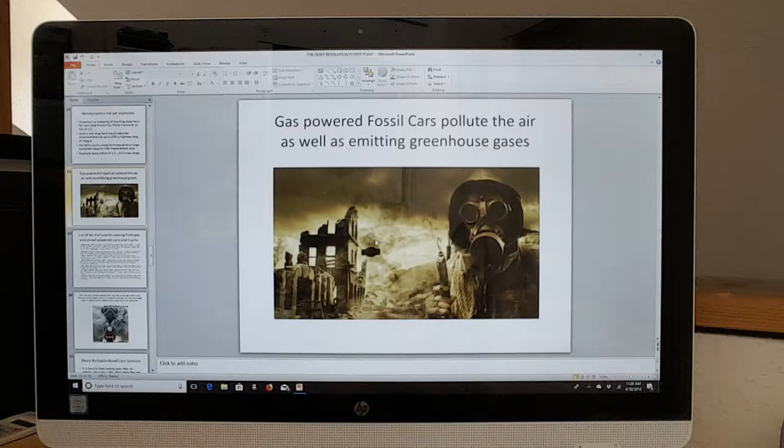So here we are. My first slide here is a little bit whimsical. It's an apocalyptic scene. But what I'm trying to get across is gasoline-powered fossil cars pollute the air as well as emitting greenhouse gases. And so I went online and I found a list of the air pollutants that come from gas and diesel-powered cars and trucks. And I was shocked at the size of the list. There's no way I can go through all this with you.

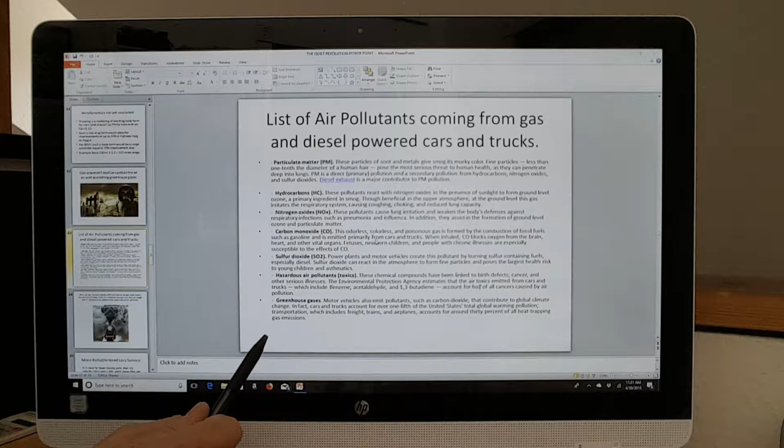We have particulate matter, PMs, hydrocarbons, HCs, nitrogen oxides, NOx, carbon monoxide, CO, sulfur dioxide, SO2, hazardous air pollutants and toxics, which account for half of all cancers, and greenhouse gases, of course. But I decided to keep the list just simply to show you how extensive it is. That's impressive in and of itself, so there you are.

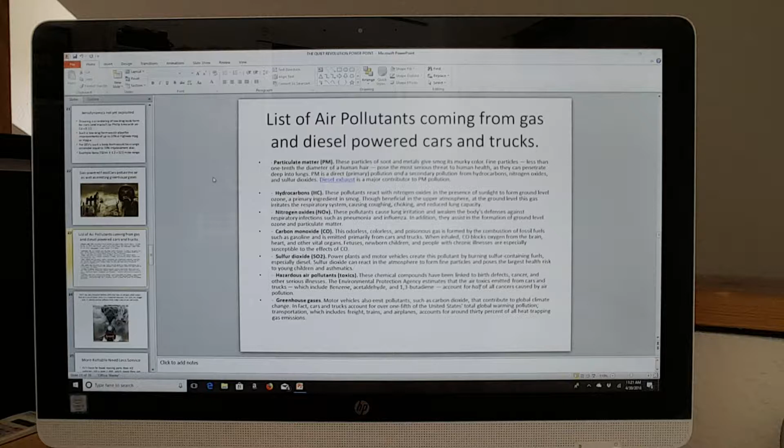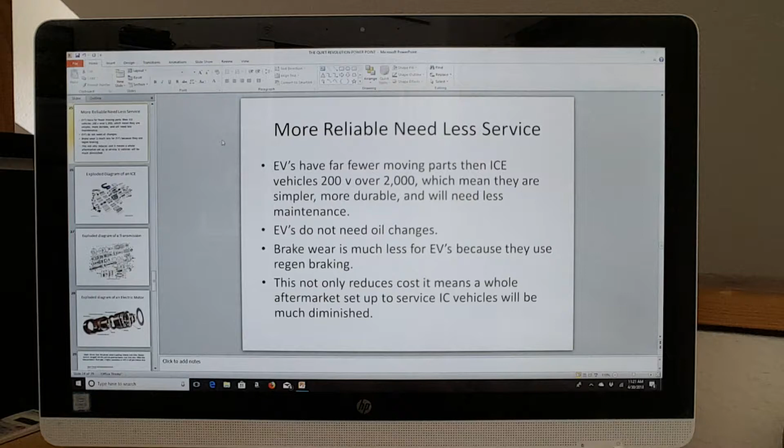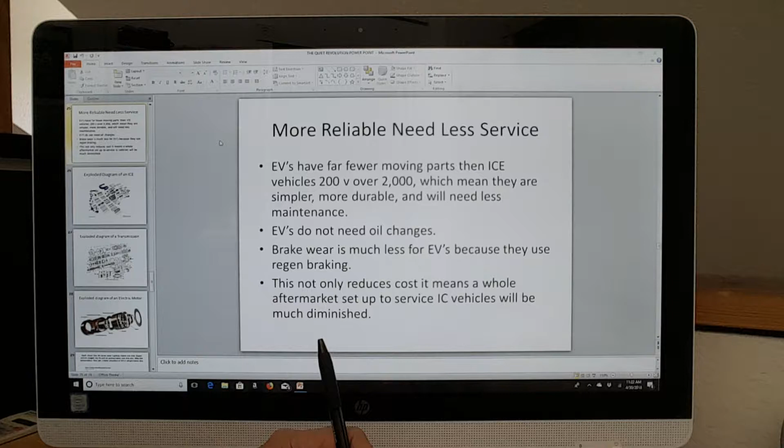EVs are more reliable and they just need less service. EVs have fewer moving parts than fossil cars, 200 versus over 2,000, which means they're simpler, more durable, and need less maintenance. EVs do not need oil changes. Brake wear is much less on EVs because they use regenerative braking. And this not only reduces the cost, it means the whole aftermarket setup to service internal combustion engines will be much diminished, which is one of the reasons the automobile industry is dragging their feet on them.

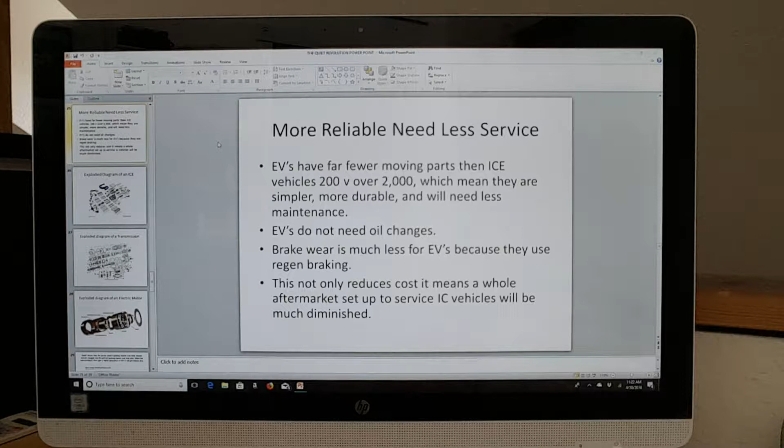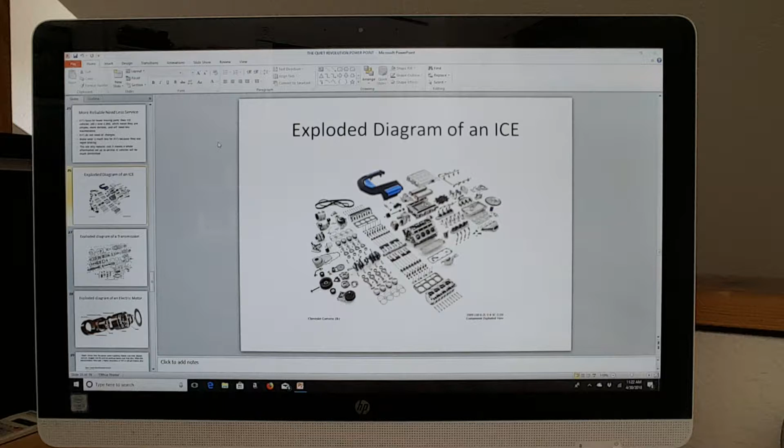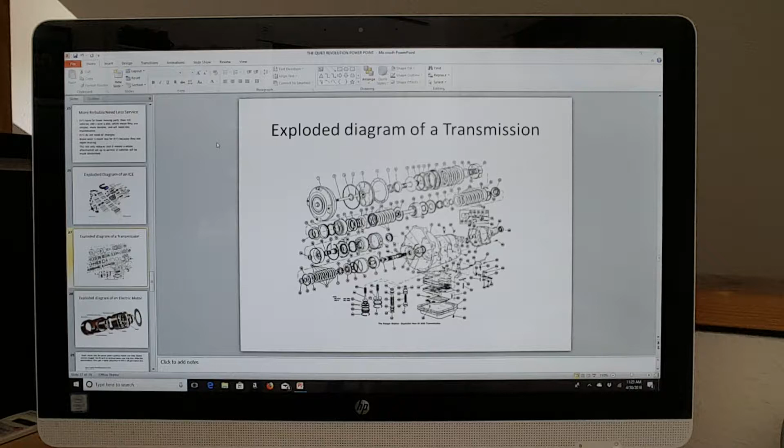EVs just have a gear reduction transmission, which allows the electric motor to run at a higher rate of speed than the wheels on the car actually run, which gives you more torque. And since electric motors can run a lot faster than a combustion engine, RPM-wise, it's not a problem. It's actually desirable.

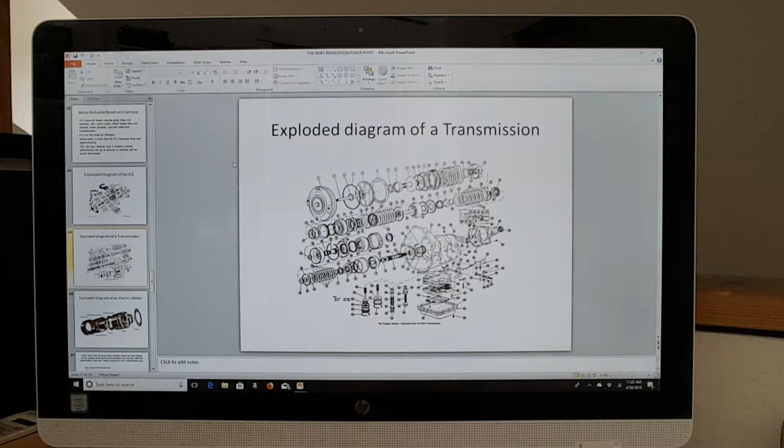And here's the exploded diagram of an electric motor. As you can see, it's simplicity itself compared to the internal combustion engine. I'm going to go back real quick to it just so you can see it. Right there. There's your internal combustion engine. There's your electric motor. Enough said.